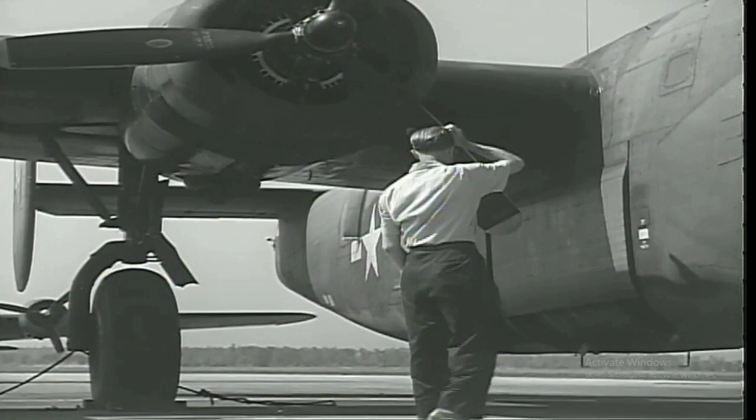The flight testing of modified aircraft, too, ranging from the odd combination of a B-17 nose applied to a B-24, to a lopsided cockpit added to a P-38, is all in a day's work for the flight test pilot.

Whether it's the largest of bombers or the smallest of experimental fighters, each airplane must be flight tested, all of which emphasizes the important role the flight test pilot plays in the development and acceptance of aircraft and equipment by the Air Forces.

Such an enviable rating may seem a remote possibility to a lieutenant fresh out of flying school and about to take off on a flight test training course. To illustrate the various steps he must take, this chart outlines his progress from the start.

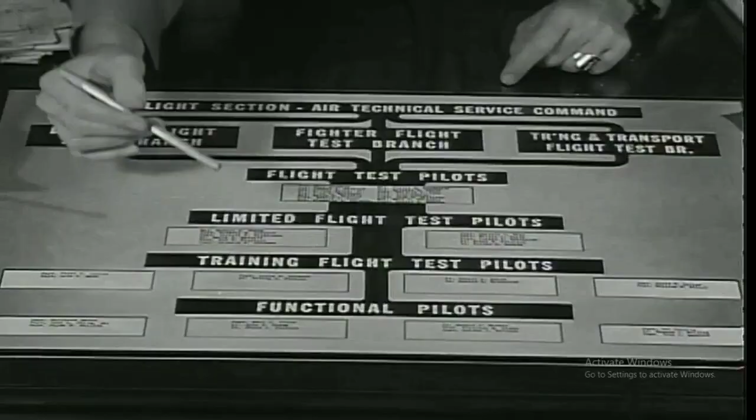His initial classification will normally be that of functional pilot. Assigned to the less involved tests, he will become acquainted with many types of airplanes, developments, and modifications. If he can stick this out, he will advance to the training bracket.

The limited flight test grade widens his experience in many types of airplanes, during which he will learn how to sweat out his tests. His chances are somewhat less, of course, in becoming one of this group of test pilots, whose judgments and decisions are so important in any one or all of the branches, bomber, fighter, or training and transport, under the flight section of engineering and procurement.

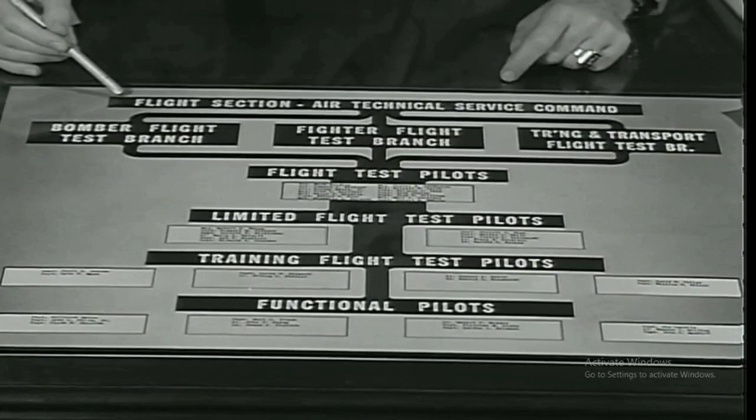Much of the flight testing is conducted upon recommendation from theaters of operations. Tests that have to do with modifications or development are requested by Air Technical Service Command Headquarters.

However, the majority of tests are requested by Production Engineering, the Technical Staff of Engineering Division, and the many Wright Field laboratories.

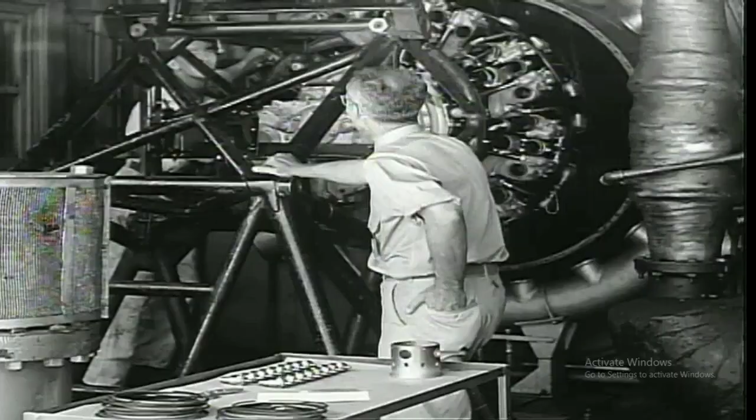Aside from performance or flight tests, there are many incidental tests. For instance, any factory or laboratory data on piston rings, after having been run in on a block test, cannot include the variables that will show up under flying conditions.

The result of high temperature or wear from sand and dust do show up when flight tests are made here or at some desert air base.

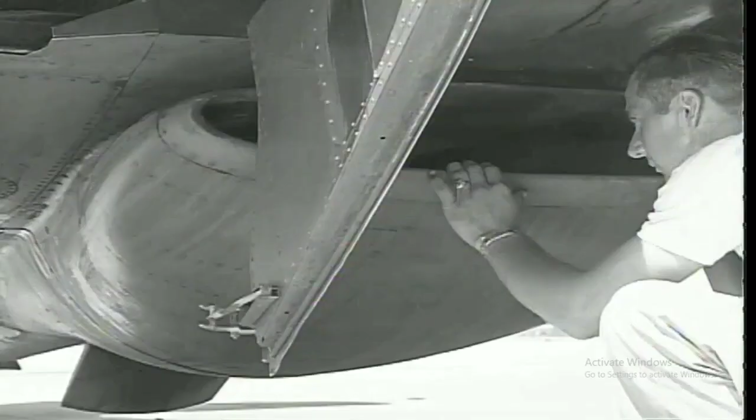Again, when the size of an oil radiator is found to cause considerable drag, hot oil tests are conducted. These will determine if the size of the radiator can be reduced to increase airspeed without causing engine failure or reducing engine efficiency.

Developments on landing gears require landing and taxi tests to find out their effectiveness in snow, sand, and mud. Such tests are usually jobs for the unseasoned pilot. But when he has shown that he can take long hours, seven days a week, and an intense interest in his assignments, he will be advanced according to his abilities.

When considered competent, he will then be assigned to an aircraft to get performance data. Prior to all tests, a flight test engineer contacts the source of the request personally and determines in detail the specific information desired. It is he who checks the assignment of the airplane to be flown and sees to it that it is properly loaded and equipped for the test.

Now our flight test pilot comes into the picture. He and the engineer become a ways and means committee to determine the best procedure for the test. Of these ways and means, the type and weight of the airplane is considered, the fuel capacity, type of instrumentation, and the pilot's endurance. Several data cards will be needed, one for each test. On each card is outlined the flight test procedure for that particular kind of flight test.

Records of each test are to be entered by the flight test pilot on his data card clipped to a holder on his knee. The use of a stopwatch computes his timing.

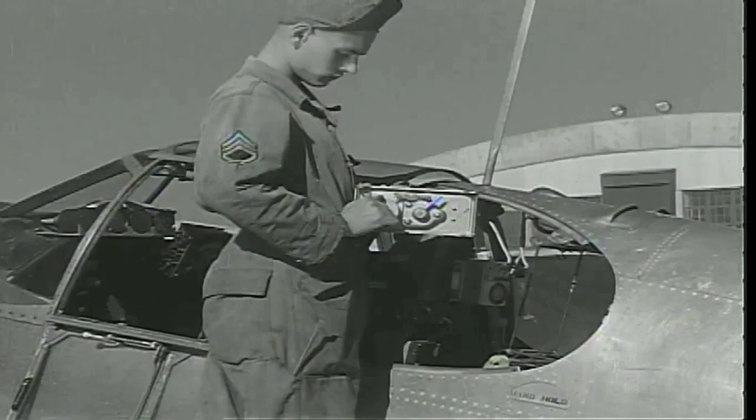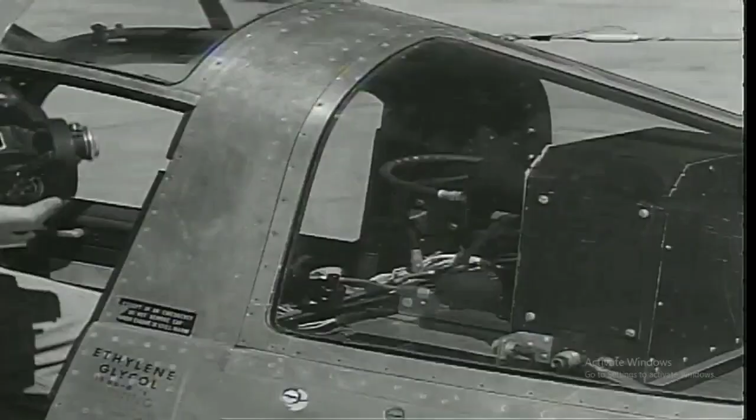Then, to obviate the chance of human error during some tests, two devices automatically record other desired readings. The barograph, which from takeoff to landing traces a record on its blackened paper cylinder, and a fixed movie camera driven by a spring motor. This is focused on an auxiliary instrument panel and will photograph steadily or intermittently the readings of the instruments during the test period. The test records of these two devices are used singly or compared with each other and the pilot's data card.

Since the answers to all tests are based on a correct airspeed calibration and altimeter check, this becomes the first of all tests.

Having obtained from the flight test laboratory a barograph, stopwatch, and camera if a photographic record is to be made, the procedure is now up to the pilot, providing the weather conditions are favorable. In this case, low wind and smooth air at low altitude, since several runs are to be made over a speed course. Before takeoff, the altimeter is set at 29.92.

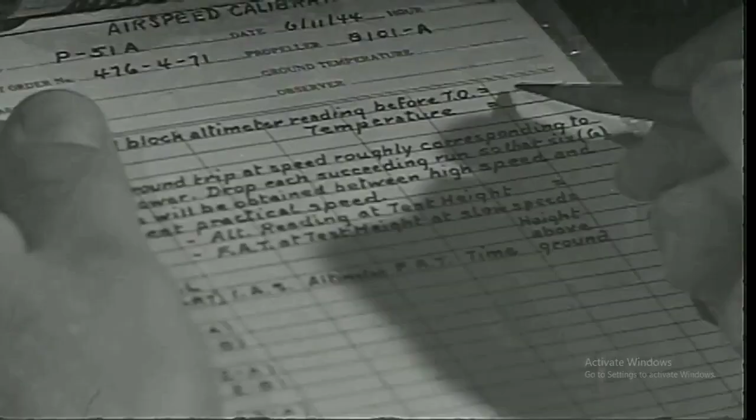The altimeter reading and free air temperature are then noted on the data card.

When the speed course is reached, it is traversed at the approved low altitude and slow speed. This is done in order to make another check on the altimeter and temperature in this locality. Remember, these readings are always taken before takeoff, before and after the actual calibration, and again after landing back at Wright Field, because it is these figures that enable the flight test engineer to compute the airspeed installation error.

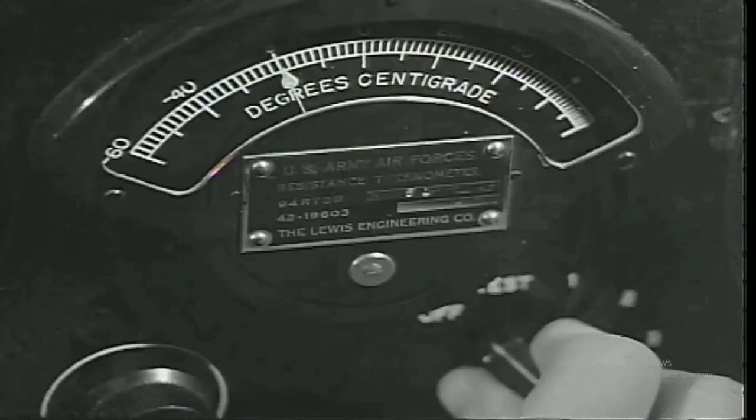The effect of a crosswind must now be considered. An effective run can only be made by disregarding drift and flying the airplane on the compass heading of the speed course. Now for the first half of the first calibration run.

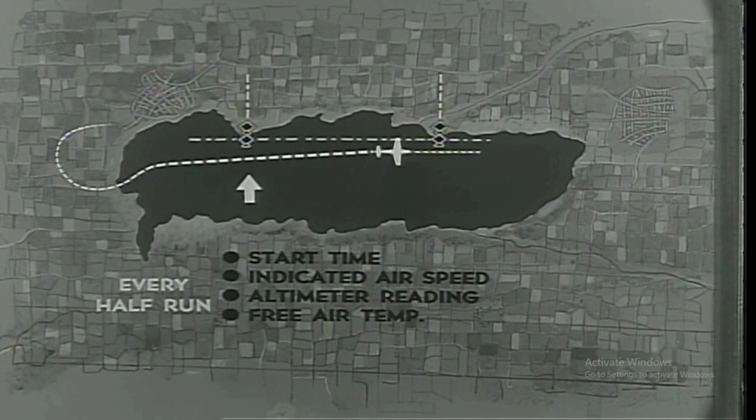Having gone back far enough to attain maximum speed well before reaching the marked course, the stopwatch is started opposite the first set of markers. The indicated airspeed, the altimeter, and free air temperature are noted, and the watch stopped in passing the last markers. All this information is now entered on the data card.

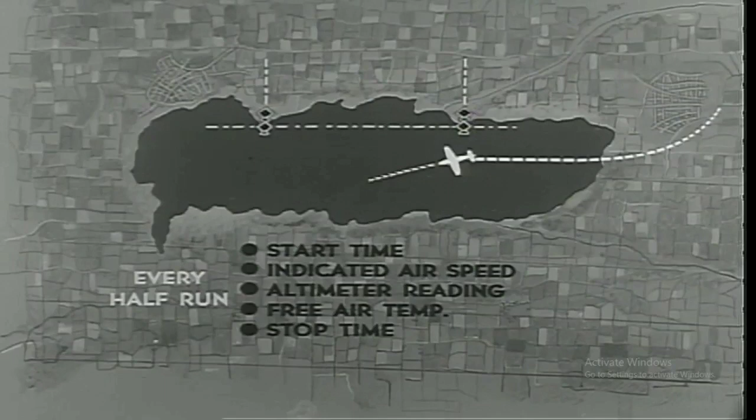Returning for the last half of this first run at the same speed, the same procedure of clocking, reading, and entering is repeated. Other complete runs at lower speeds are made and the recording procedure repeated, not overlooking that final altimeter and temperature check at the speed course, and again before you step down from your airplane on the ramp at Wright Field. Remembering that you've been out for an hour and a quarter, there's probably a change in both barometric pressure and temperature. Obviously, there has been a change, and now the flight test engineer can compute to his heart's content.

An alternative procedure in obtaining airspeed calibration is frequently used in which another airplane is employed instead of a speed course. This additional aircraft is kept up to accurate calibration and functions as a pacer airplane during the test. The various check intervals are signaled visually from one pilot to the other.

In this procedure, the altimeter checks at various speeds are made by buzzing the tower both before and after the test. This is not the fun it seems to be. It's a job of precision flying.

Then someday, when the weather is just right, you'll be running a critical altitude flight test. In other words, finding the highest altitude at which rated power can be obtained on this airplane and recording the necessary data.

You will recall your session with the flight test engineer when together you decided that for this test you would make 5 level flight runs at altitudes that would produce the needed data. Functional settings during the run must include the prop at 3,000, mixture auto-rich, throttle wide open, flaps completely closed, and landing gear up, not overlooking the necessity of setting your altimeter at 2992 before takeoff.

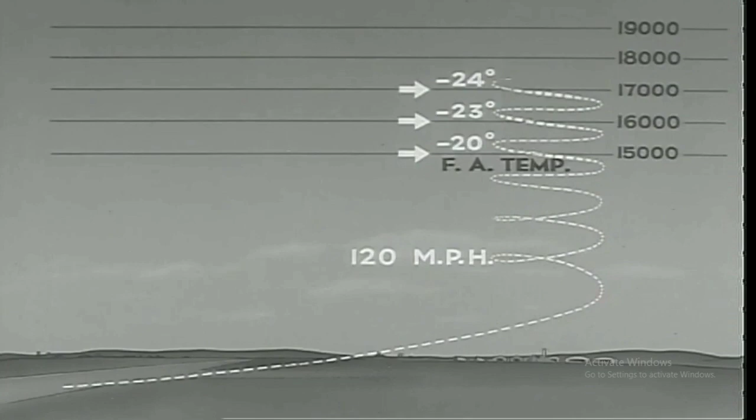During the climb, readings are taken at each test altitude of the free air temperature at an airspeed of 120 miles per hour. Then getting above the top test altitude with the prop set at 3,000, mixture auto-rich and throttle wide open, the run is started at exactly 19,000 and held there until a completely stabilized condition is reached.

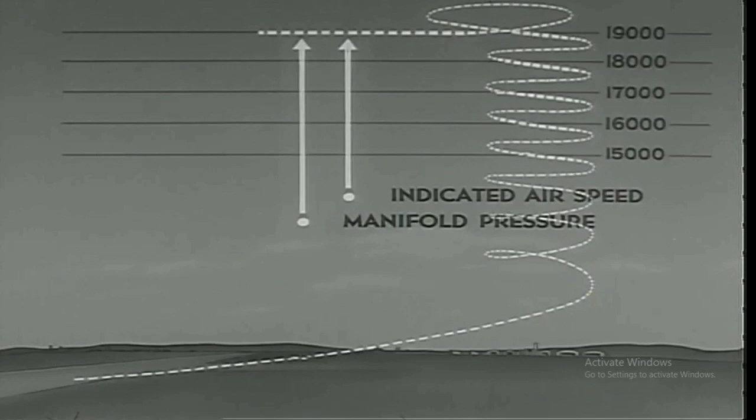That precise condition will not be arrived at, however, until you've learned the meaning of sweating it out. That's what you came up here for, to hold her until you could get accurate readings for the flight test engineer: indicated airspeed, manifold pressure, carburetor air temp, oil temp, and cylinder head or coolant temp.

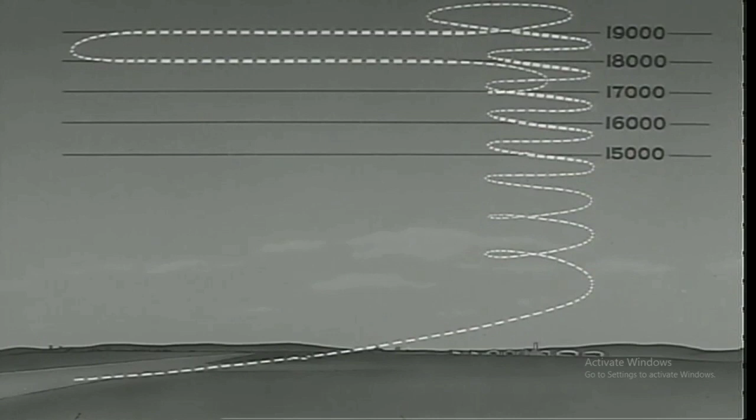With these few little details entered on the data card, you can drop down to 18,000 and do it all over again. Then down to the other level specified on your data card, at each level repeating the same procedure of reading and entering.

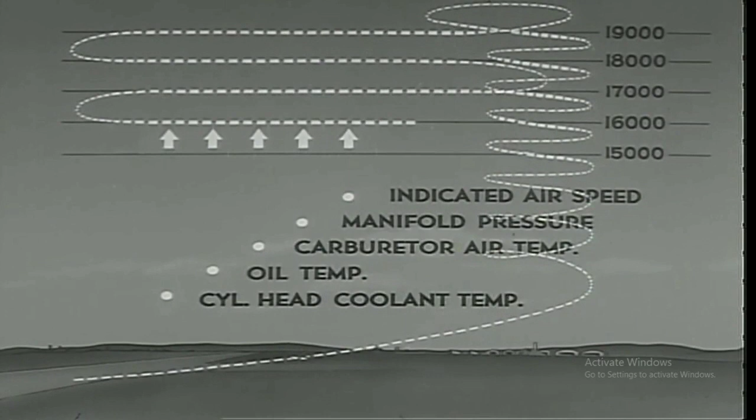Maybe not quite as fast as the action of this graph, for the actual test flight takes about an hour and a half of precision flying. With this test completed, maybe you can call it a day if your data card is complete with the date, time of test, and your somewhat shaky signature.

After the flight test engineer has computed your data to determine the critical altitude, we come to the test for power calibration and high speed points, or to find the best airspeed for various engine settings.

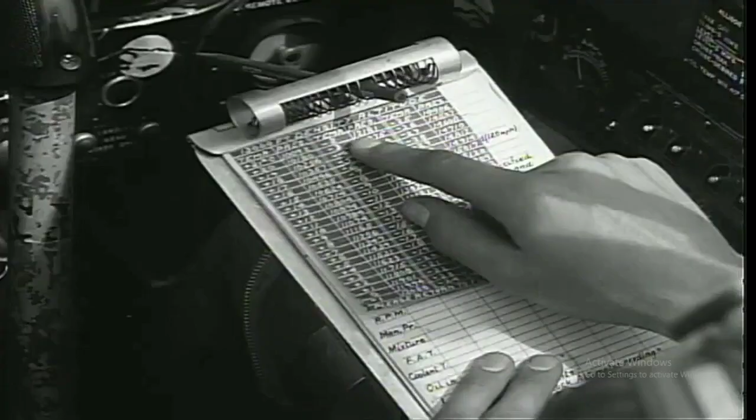Since the desired altitude is unknown and varies from day to day, a density altitude table is used to find the altitude at which this test is to be run. Again, the altimeter is set before takeoff, 29.92.

Then a search for the altitude where your air temp and altimeter readings agree with the matching combination shown on the density altitude table. When this altitude is found, again as in the previous test, the prop setting must be at 3,000, mixture auto-rich, throttle wide, cowl flaps closed, wing flaps and landing gear up, and the run proceeds exactly as in the critical altitude test.

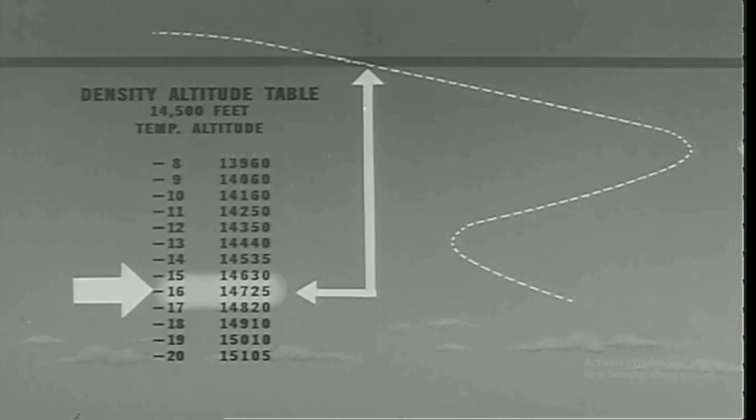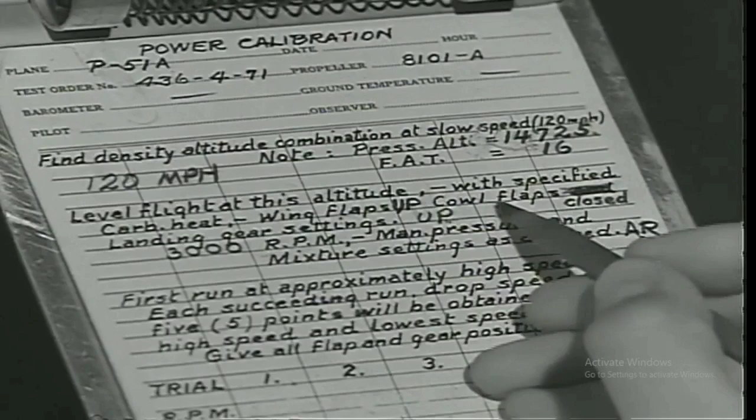A short pull-up identifies the end of each run on the barograph record. The second run is made with procedure unchanged, except that the throttle is pulled back to a point that will reduce the manifold pressure 2 inches. For each succeeding run, the throttle is pulled back for an additional 2-inch reduction of the manifold pressure, and entries are made of these important readings on the data card.

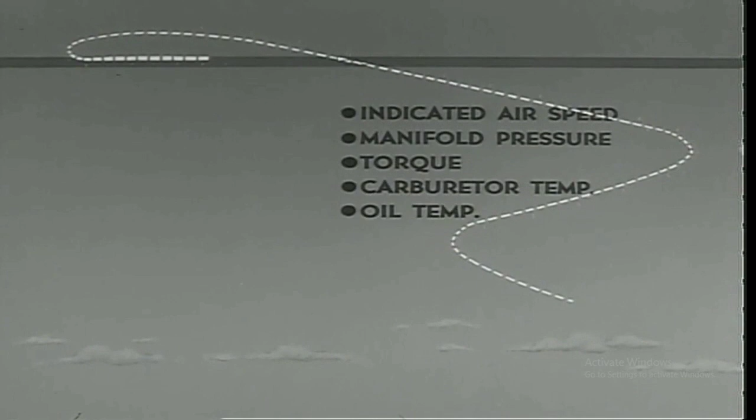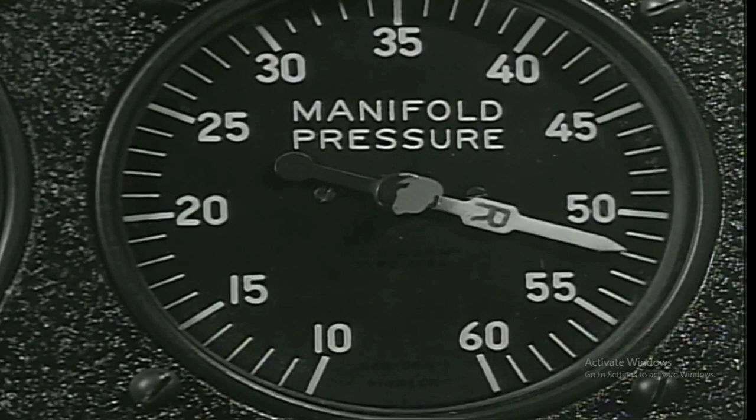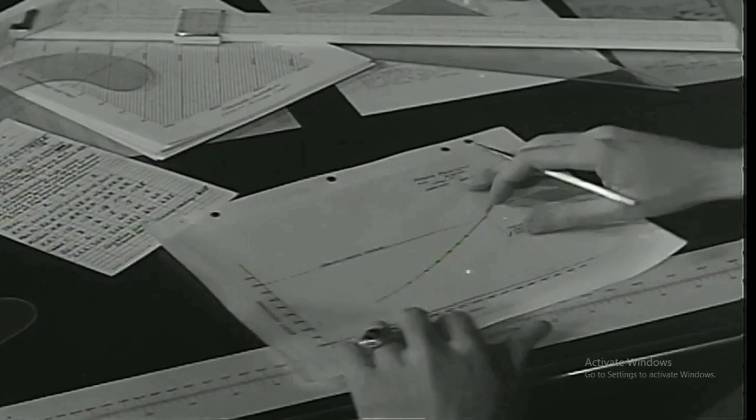All runs completed, we now have the necessary high speed points in relation to manifold pressures. This data is then reduced by the flight test engineer to a curve representing the variation of speed with power at the critical altitude. Consequently, with the rated power of the engine at critical altitude, the curve shows us the maximum speed of the airplane.

Now that we have covered the test procedures for all level flight performance, here are the tests to ascertain the most efficient climbing speeds and the best rate of climb. In order to determine the indicated airspeed for maximum rate of climb, a series of short climbs are made through an altitude range agreed upon by you and the flight test engineer.

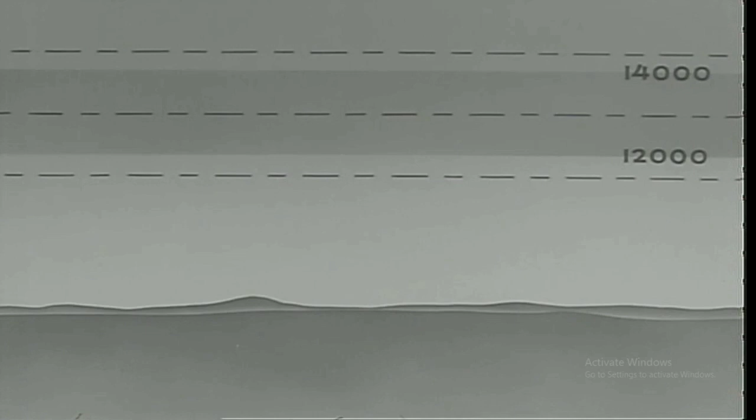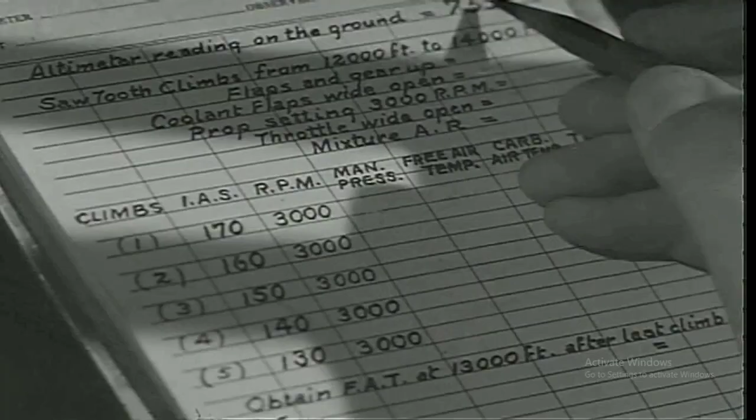In this test, the barograph for the first time becomes a primary instrument. The stopwatch is again used, and as in all test procedures, the altimeter setting is important. Again, a check is made as before, from prop setting to landing gear. In this test, the coolant flaps and oil shutters are set wide open.

Care must be taken in flying this test to make certain the airplane is in a steady climb at the indicated airspeed specified on the data card before the desired lower altitude is reached. This specified airspeed must be maintained to a point at least 500 feet above the predetermined altitude range.

Upon reaching the range, the stopwatch is started. Midway, the manifold pressure and carburetor temp are noted and entered on the data card. When the top altitude is reached, the watch is stopped.

Then the time is entered on the data card and the watch is reset at zero. After continuing the climb to 500 feet above, you can then drop down below the bottom of the range far enough to again reach a steady climb before re-entering the testing altitudes.

If the air has not been perfectly smooth during this first climb, the test should be discontinued. But assuming that it was smooth, the second climb is made, holding steadily to the next indicated airspeed on the card, and the readings entered as in the first run. These sawtooth climbs are continued until all the indicated airspeeds for the test have been covered.

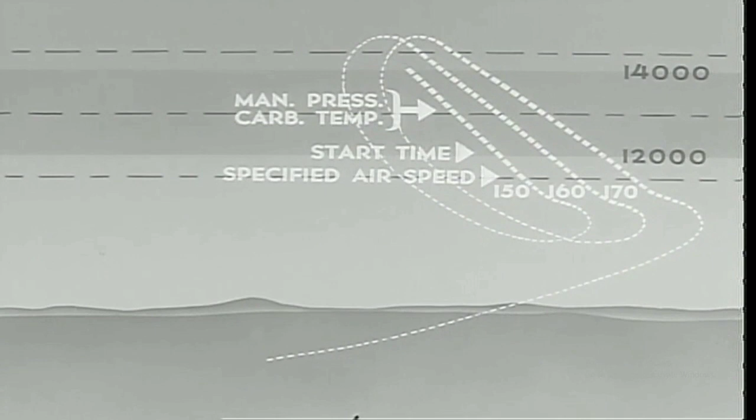On any one of your descents, when midway of the range, a free air temp reading should be taken at slow speed. Your card will now have all the desired data, and you will also have a barograph record of every climb.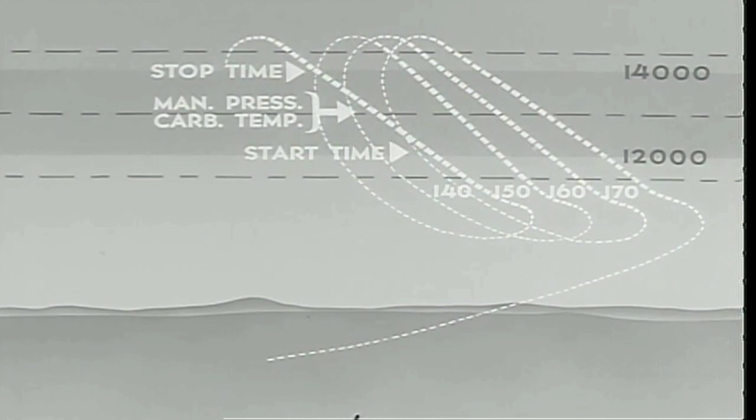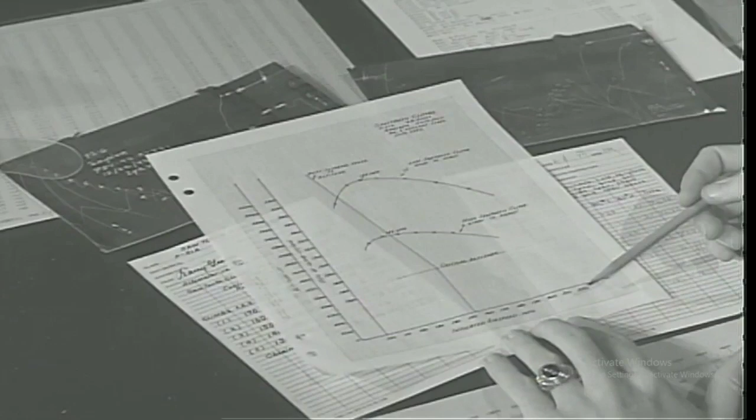When this record has been calibrated in the flight test laboratory, your engineer checks it against the readings you entered on your data card. Since the most efficient climbing speed varies with the altitude at which the test was run, other similar tests are made at various altitudes in order to find the best climbing speed at any altitude. Once these speeds are determined, we can proceed to the next test, the check climb.

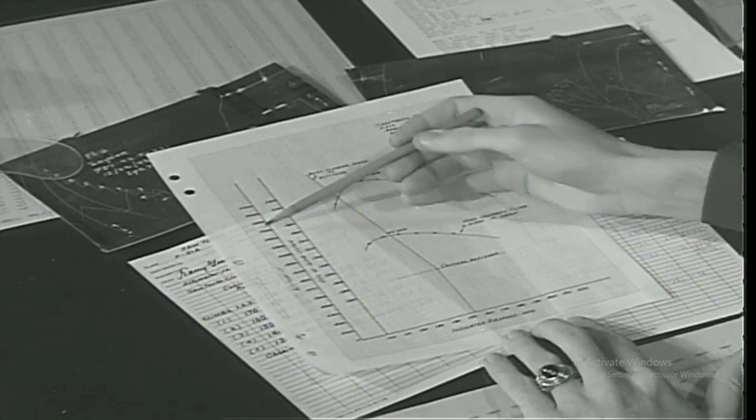There are several ways of finding rate of climb and time required in climbing, but a continuous climb to as high as the airplane will go will get the best answers within a reasonable amount of flying time. Before starting this test, if clouds are noted at 10,000 feet, better postpone it, for smooth air is essential. Assuming that it looks favorable, let's make a try for it.

After the flight test engineer has specified on this data card the best indicated airspeeds resulting from the previous sawtooth climbs, the pilot needs for this test, along with the barograph, a different type of stopwatch. Having two hands, it measures two time periods.

Once the barograph is caged and started, the altimeter is set at 2992. Again, as in the sawtooth climb, all the specified settings, from prop at 3000 to landing gear up, are checked.

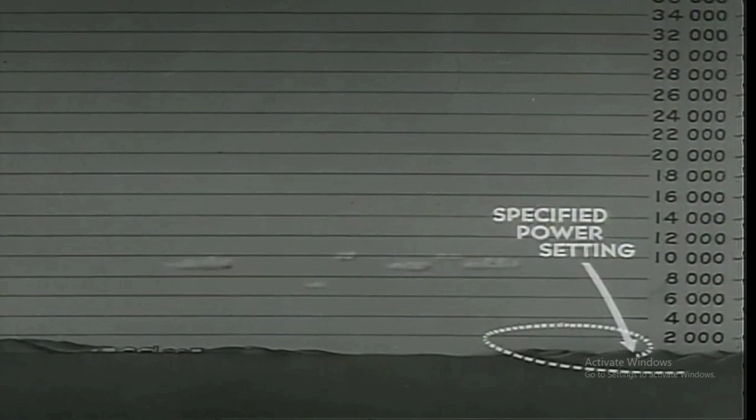Then, slowing the airplane down to the specified airspeed at as low an altitude as possible, the throttle is advanced to the proper setting specified on the card, and the airplane pulled up into a climb, keeping the airspeed constant. From here on, the airspeeds must check exactly with those speeds called for on the card.

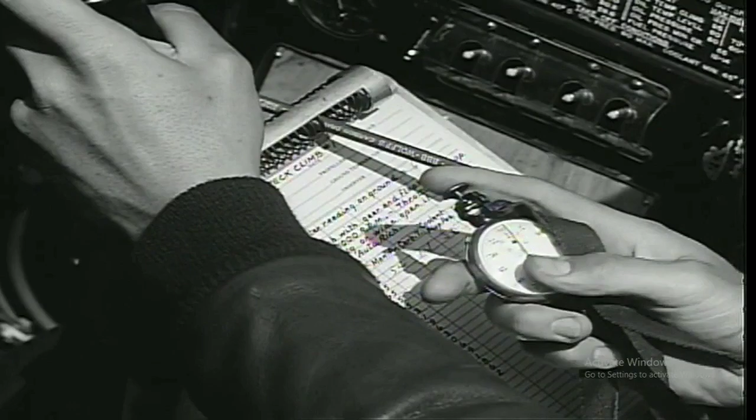The split-hand stopwatch is started at the first even altitude after stabilized climb is attained. At this altitude, readings are taken of the manifold pressure, cooling flap position, and carburetor air temp.

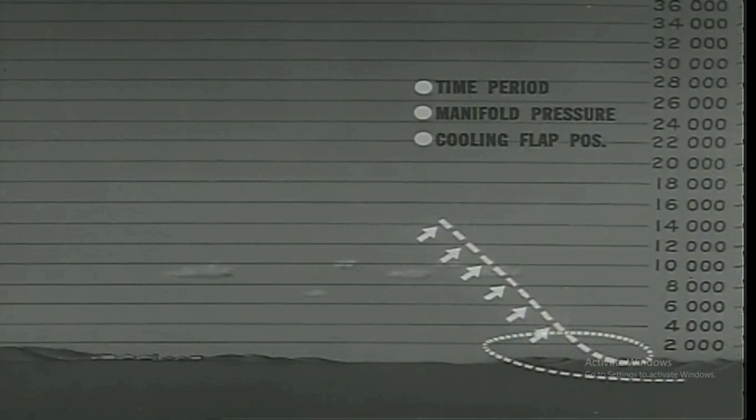At the next even altitude, one hand of the watch is stopped. The time is noted along with the manifold pressure and other necessary readings, as before. The stopped hand of the watch is then brought up to the moving hand. This procedure is repeated at every even altitude, all the way to the top of the climb.

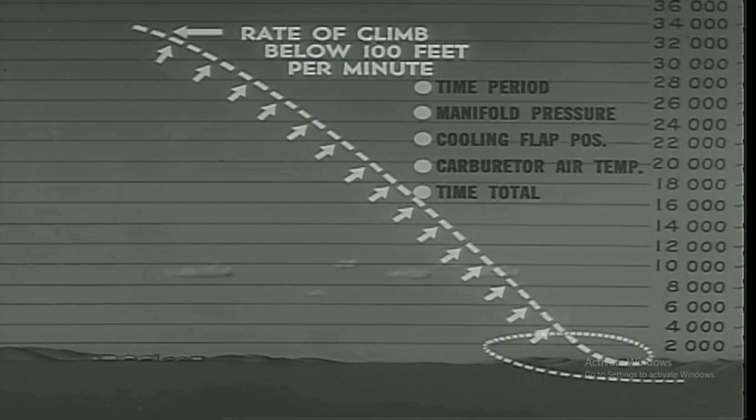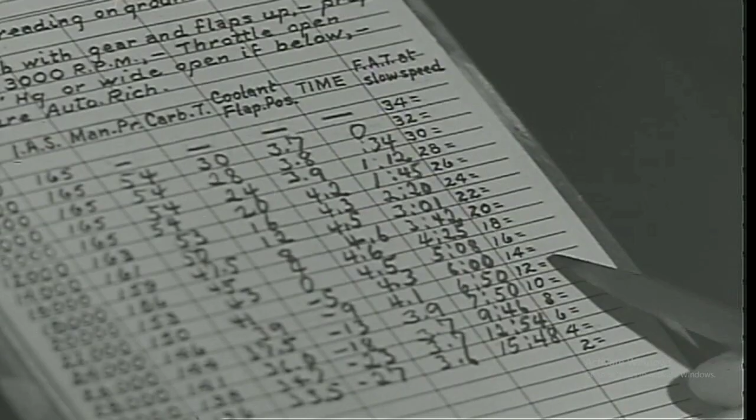The top is reached only when the rate of climb drops below 100 feet per minute. The entries on your data card now show the test completed, except for the free air temp readings at slow speed. These are made at the even altitudes on your way down, taking readings at each altitude at which you took readings during the climb.

Because of a probable weather variation at the testing altitudes, and the chance of human error in procedure and readings under such circumstances, the whole thing has to be done all over again.

After the second test run is made, and not until then, can these barograph tracings, combined with the information on both data cards, form a basis from which the engineer can determine four things: the maximum rate of climb, the minimum time required to climb to any altitude, the service ceiling, and the absolute ceiling of this particular airplane.

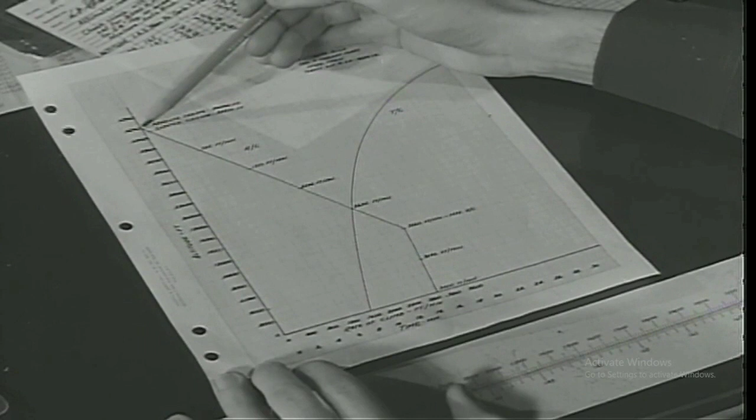This covers all level flight and climb tests. These flight tests thus far have found the best climbing speed, the ceiling, the critical altitude, and the top speed of an aircraft. The next and last are the takeoff and landing runs, the most advanced of all flight tests.

Owing to the nearness to stalling speed at low altitude, they are also the most dangerous. Good visibility is needed, and the wind must be less than 10 miles per hour.

No extra instruments are taken along, for a camera crew on the ground will take a motion picture film record of your takeoffs. They will have noted the wind velocity and direction, barometric pressure, and free air temperature. These and the film will enable the flight test engineer to compute your ground roll, ground speed, and after leaving the runway, your earliest clearance over a possible obstacle.

At least 30 minutes before the test is to be run, you will have informed the flight test laboratory. This will allow the camera crew sufficient time to set up their equipment.

Their camera must be positioned over a fixed marker located in the center of the field and several hundred yards from the runway you are going to use.

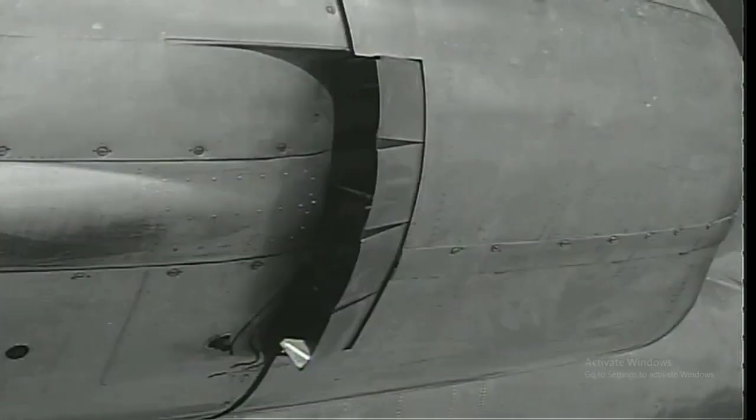Once on the taxi strip, the pilot waits for signals from the camera crew. The brake should be locked and the altimeter set at 29.92. The free air temperature is noted and entered on the data card. The cowl flaps must be set, and the data card specifies their proper position.

The wing flaps on the B-26 are in best takeoff position when set at 30 degrees. This setting has been arrived at from previous performance takeoffs. Such settings on other airplanes may range from zero to full down.

Also, from previous tests, the pilot remembers that at this gross weight of 31,000 pounds, the B-26's best indicated airspeed for takeoff is 104. That 115 is the best airspeed to clear an imaginary obstacle in the shortest possible distance.

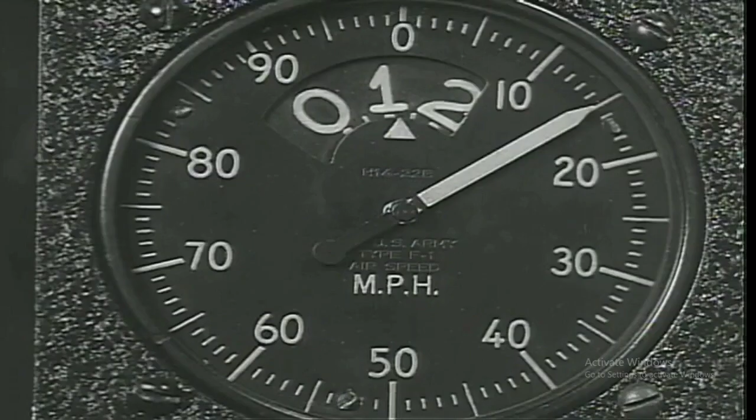Even two memory experts couldn't remember all the readings for this test in the time it takes to make one run. By that we mean the RPM, manifold pressure, indicated airspeed, and carburetor temperature as a group of four figures at three separate points of the test.

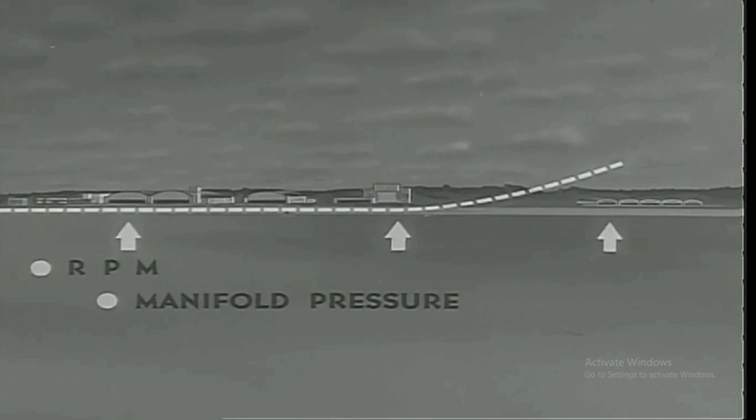So at least six runs will have to be made. Two runs to concentrate on the four readings when the brakes are released, two more runs to note these correlated figures when the wheels clear the ground, and the last couple of runs to get the four readings at the moment you reach 50 feet above the runway.

Camera records of three of these runs will be selected by the engineer to determine the shortest run necessary to clear a 50-foot obstruction.

Your signals from the camera crew are transmitted by a light gun, similar to those used in control towers. These flashes control the procedure throughout the test. When you have lined up the airplane on the runway with brakes firmly applied, you are ready to rev up the engines to the specified power and release the brakes.

If they do not hold until this specified power is reached, the power will have to be brought up as quickly as possible after releasing the brakes.

The film records, after being analyzed in a viewer, permit the engineer to average a curve showing the best takeoff performance. A simple test, isn't it? On paper.

The approved landing tests are made with the same photo recording equipment and under the same weather conditions. When the cameraman is ready, the pilot circling the field will get the green light and line up for a landing.

Coming in, when he is 50 feet above the runway, he must quickly note both the indicated airspeed and the RPM. His minimum airspeed should be such that a slight flare will result before his wheels touch.

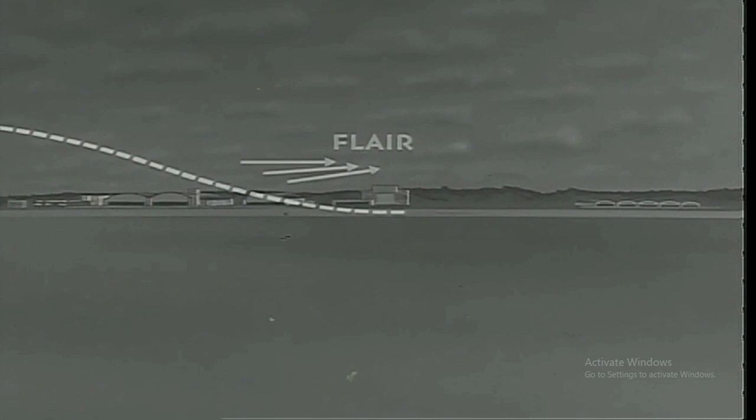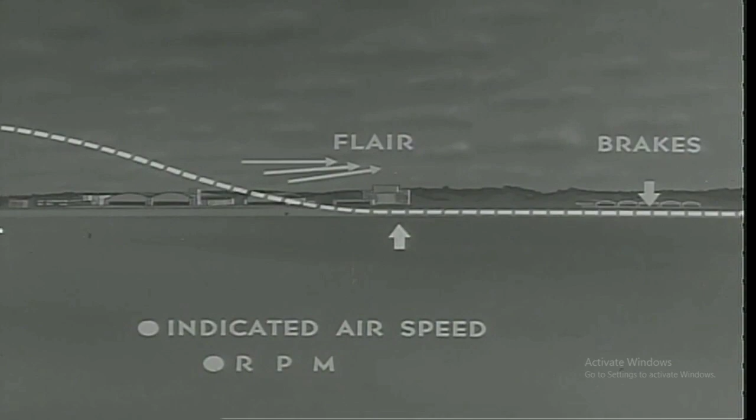The instant they contact the runway, indicated airspeed and RPM are again noted. Then the brakes will be applied as hard as possible without lifting the tail too high and damaging the prop. To the camera crew, a good landing looks like this.

After coming to a full stop, he will have time to write down the instrument reading when at 50 feet up, and when he landed. Then he takes off and does it all over again, five or six more times.

In the Flight Test Engineering Office, the film records will be translated to a curve showing the minimum distance this airplane needs to land after clearing a 50-foot obstacle.

This information is used only by engineers for comparison with other airplane performance. Therefore, it is not recommended for use by the pilot either in training or combat.

In testing the handling characteristics of any airplane, such assignments as stability, dive, spin, and aerobatics tests are entrusted to only the most experienced of flight test pilots. More often, it is up to him to judge the results rather than the engineer.

You can expect no thrilling exploits, no heroics, no public acclaim. Aside from work well checked by the crew chief, the weatherman, and communications, your life will often depend on your own reactions in an emergency.

All flight tests conducted at Wright Field are based on many years of research and the experiences of men having the most comprehensive range of facilities in the world.